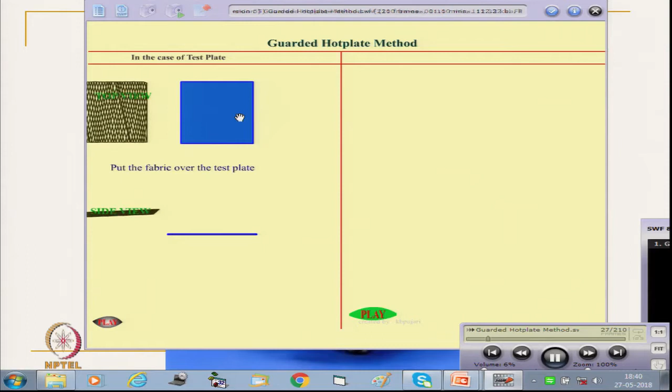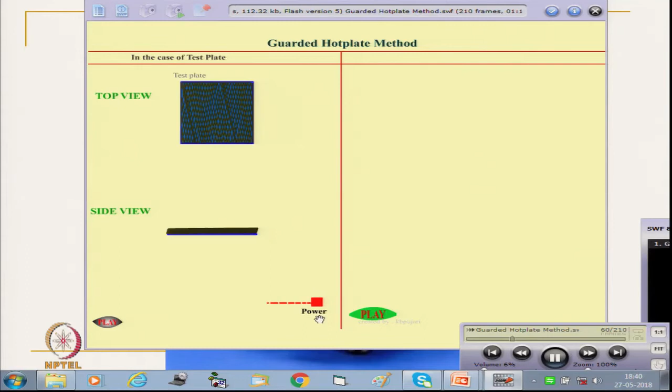Let us try to see once again the principle of the guarded hot plate. Here we have to control the heat flow through the hot plate, so that only the heat flowing through the fabric is measured. This is the normal case: a side view and top view, fabric is placed on the test plate, and the test plate is connected with a power source. As soon as the switch is turned on, heat starts flowing in different directions.

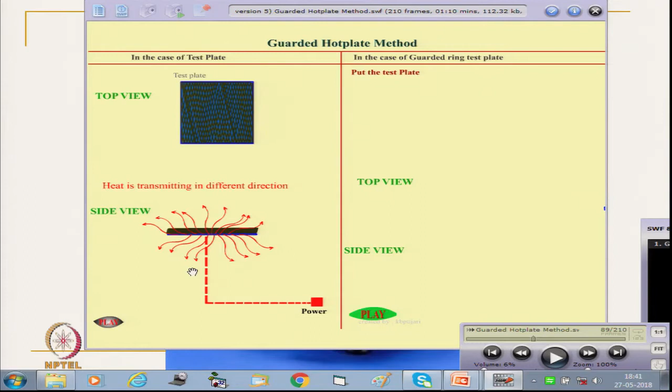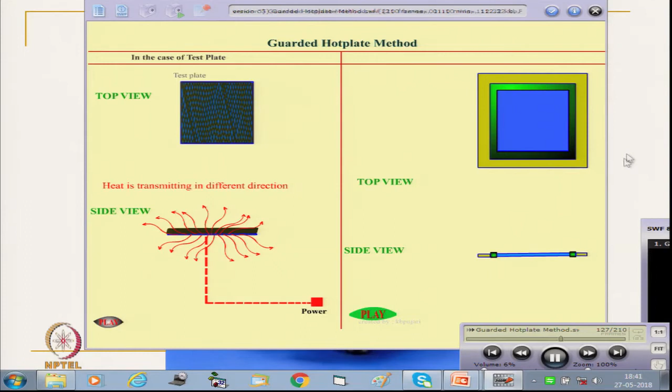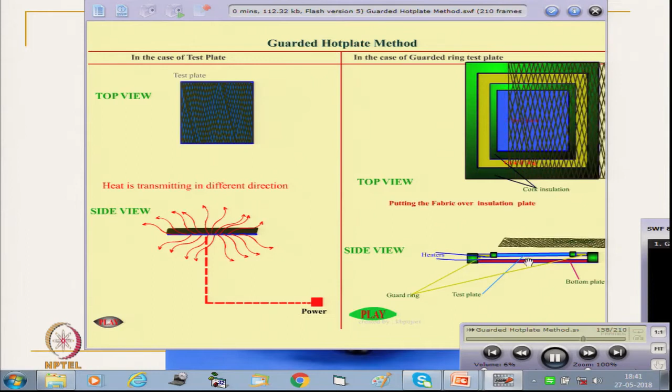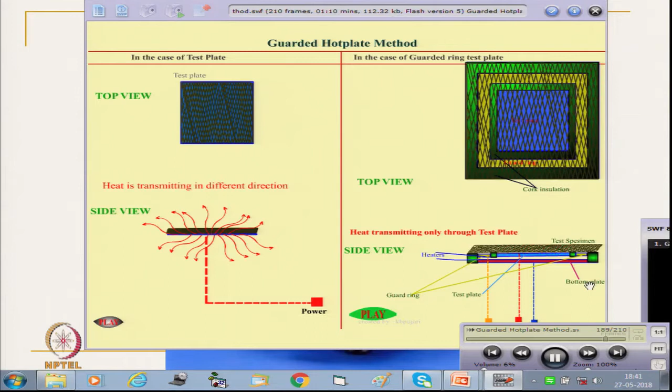What we actually want to measure is the heat flow through the fabric. So to restrict heat flow in other directions, sideways and downward, we have to use a guard ring and some insulator. This is the top view and side view of the test plate with the insulator; the guard ring is placed, and this is the bottom plate, with fabric placed over it. Both the guard ring and bottom plate, and the test plate, are heated at the same temperature, so that no temperature gradient exists, and heat is transmitted only through the test plate and fabric sample. Accordingly, we can measure the heat transmission.

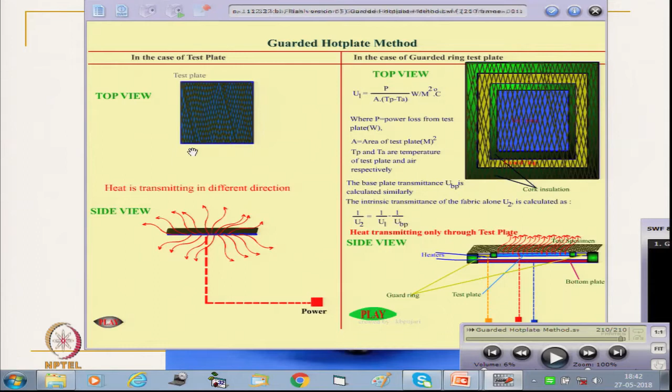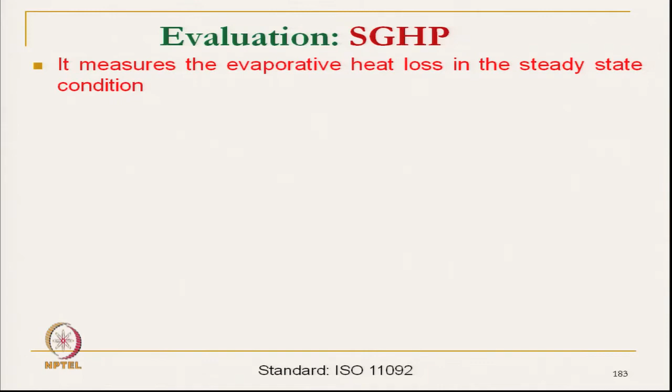In the sweating guarded hot plate, the principle of measuring heat transmission remains the same, but in addition, water is supplied, and the plate here is not the same similar plate - it is a perforated plate, which simulates sweating while the principle remains the same. So the sweating guarded hot plate measures the evaporative heat loss in steady state condition, whereas the guarded hot plate measures thermal transmission, heat transmission. Here, evaporative heat loss is measured.

When moisture gets transmitted, how much heat it takes away gives an idea about moisture transmission. The temperature of the guarded hot plate is kept at skin temperature, which is very important, and this has to be kept constant. The total water vapor resistance is calculated - this is RET, the water vapor resistance including the air layer, fabric layer, and air layer - expressed in terms of meter square Pascal per watt.

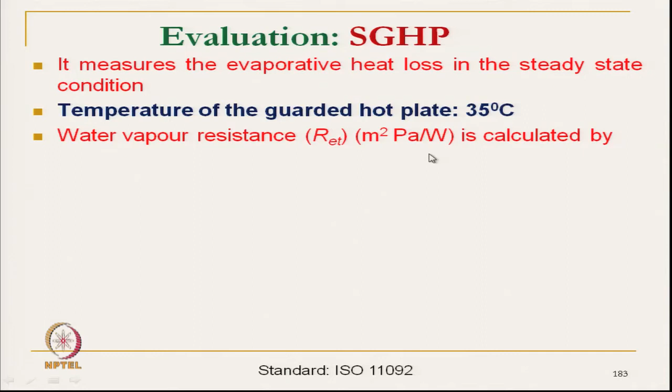So in terms of heat transmission, it is measured using this equation, where A is the area, and Pm is the saturated water vapor partial pressure of the measuring unit - meaning the measuring unit is at saturated condition with water vapor Pm. PA is the partial water vapor pressure of the atmosphere, so this gives the water vapor pressure difference. H is the amount of heat supplied for evaporation, delta H is the correction factor, and RET0 is the evaporative constant of the instrument. This is the total system.

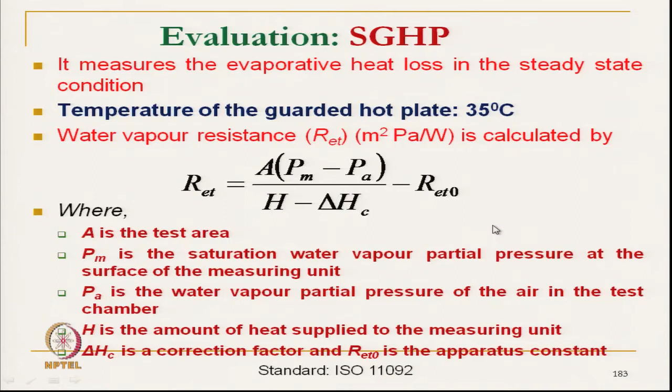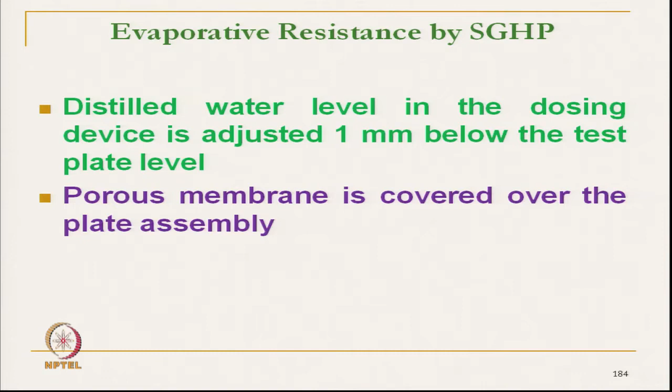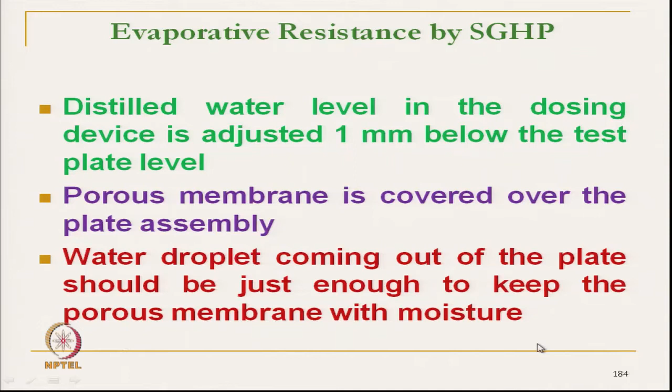Water droplets coming out of the plate should be just enough to keep the porous membrane moist - it should not wet the fabric.

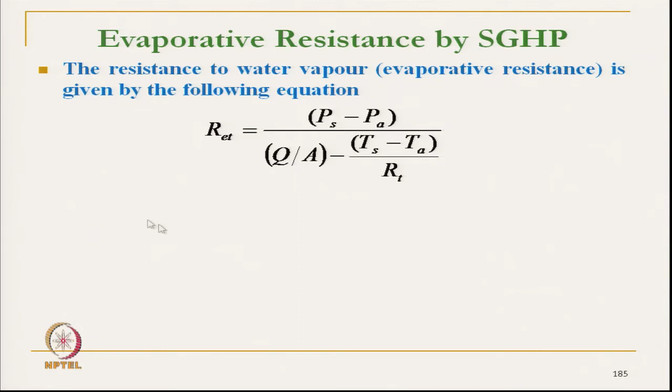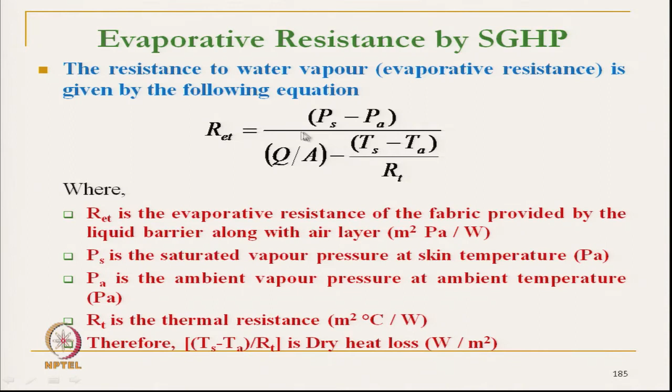So that is the dry heat loss, and here is the wet heat loss, which is the total heat loss. If we take the total heat loss and subtract the dry heat loss from it, we get the heat loss due to evaporation.

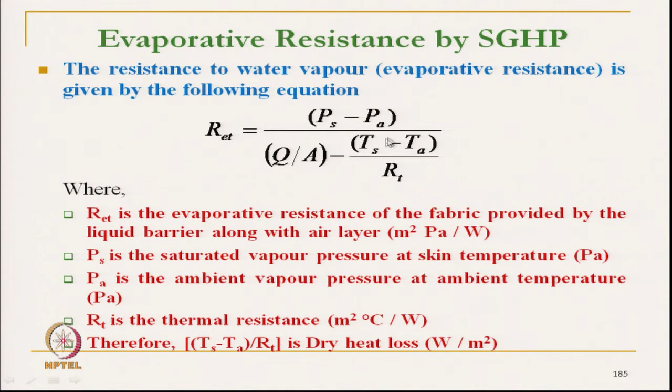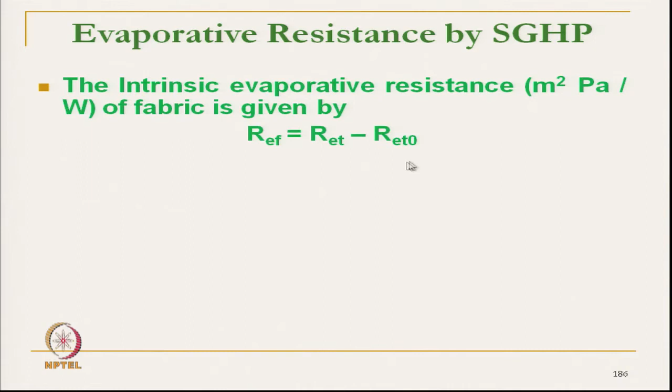So total evaporative heat loss is measured by the pressure difference, and the evaporative resistance we can measure by subtracting the evaporative resistance of the air layer. The permeability index we can measure from the dry resistance and the wet resistance. RCT is the dry thermal resistance, and RET is the evaporative thermal resistance, so the ratio gives the permeability index of the fabric. We can get the evaporative resistance of the fabric as well as the permeability index, with K as the constant. The dry heat loss we can measure in dry state.

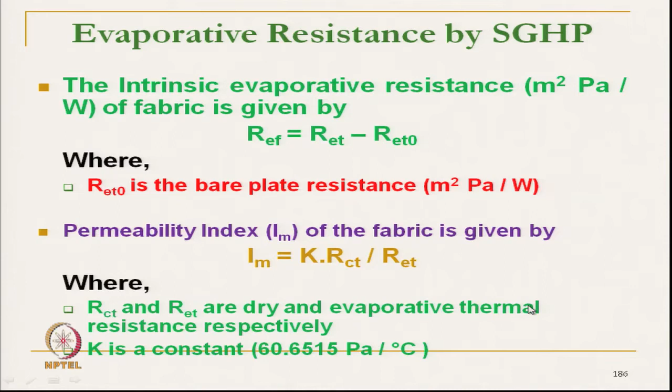To get the actual evaporative resistance of the fabric, we have to test two times. One is bare plate testing, to know the moisture vapor transmission of the air, and we have to test in the dry condition to know the dry resistance of the fabric, the dry heat loss of the fabric. So we should do repeated testing.

The next instrument is the Permetest. It is used when we want to know the moisture transmission at a very fast level. This instrument gives the result at a faster rate, whereas other instruments we have seen, like the cup method, take more time. So this method gives the moisture transmission at a higher, faster rate.

It works on the principle of heat flux sensing. That means as the moisture gets transmitted, it takes away heat, and that heat flux is measured. The temperature of the measuring head is maintained at 35 degree Celsius, and heat is supplied to maintain that temperature. As the moisture gets evaporated through the fabric, it takes away heat from the system.

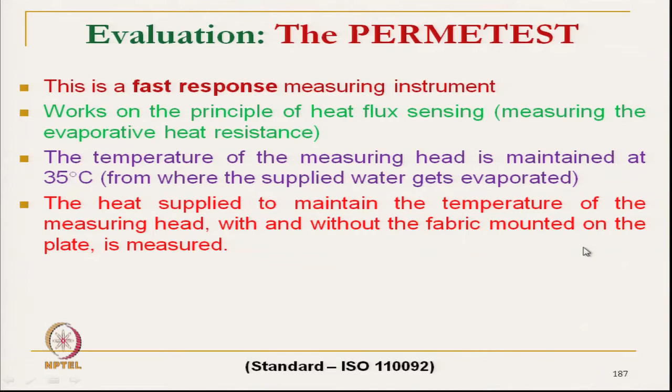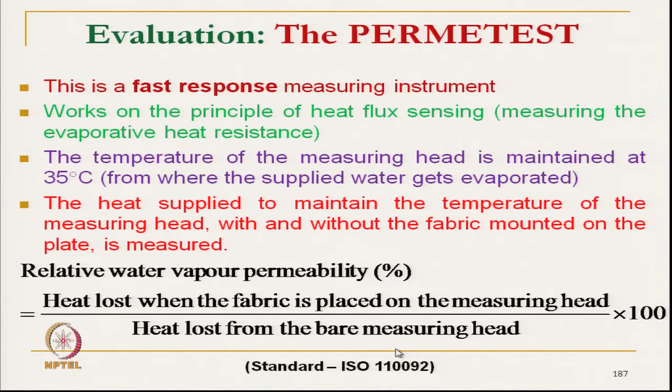To maintain that temperature, since the temperature drops, the system will draw excess heat to maintain 35 degree Celsius. That heat is indirectly used for evaporation. So it indirectly measures the heat supplied to maintain the temperature of the measuring head, with and without fabric. The ratio gives us the idea: relative water vapor permeability is the heat loss when fabric is placed on the measuring head versus the heat loss when there is no fabric but water is present. This is the system where the instrument works on the principle of heat flux sensing.

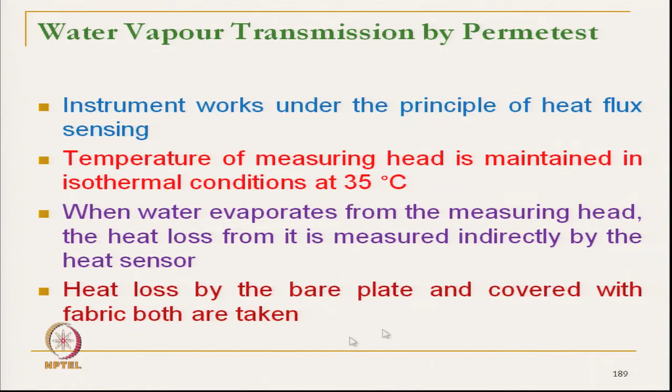This is the heat flow sensor. To maintain the temperature, it will draw extra heat from the heater, and that extra heat is measured by the heat flow sensor. That is the quantity of heat flux. The temperature of the measuring head is maintained at isothermal condition, 35 degree Celsius. When water evaporates from the measuring head, the heat loss is measured indirectly by the heat sensor, and heat loss with the bare plate and covered with fabric are both taken, and the ratio is measured.

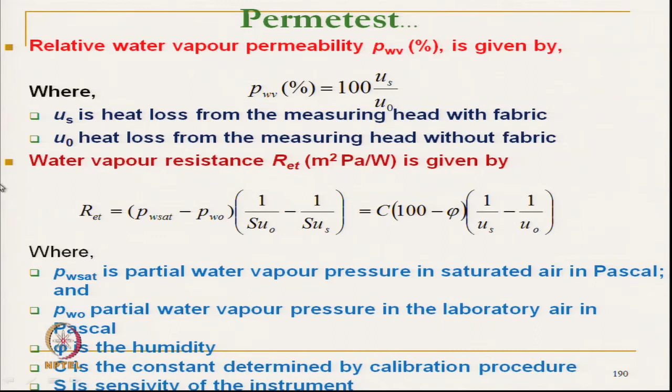So this is the way of expression. RET is the water vapor resistance, and relative water vapor permeability is the ratio of heat loss from the measuring head with fabric to heat loss without fabric. This way we can measure the permeability characteristics, or water vapor permeability characteristics, and water vapor resistance.

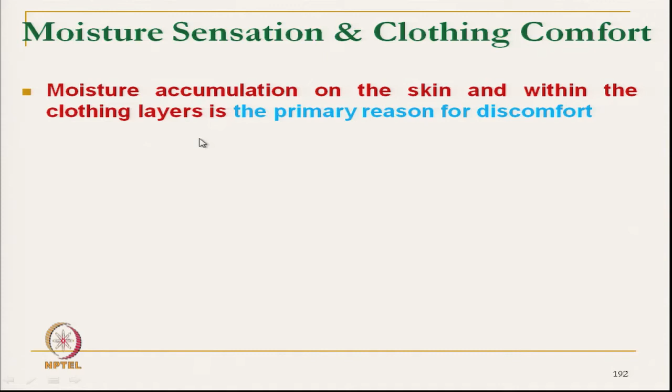The last segment is moisture sensation and clothing comfort. Moisture sensation is extremely important and directly affects comfort. The accumulation of moisture on the skin and within the clothing layer is the primary reason for discomfort, and this problem is intensified further in functional clothing, because we need comfort as well as function, and most functional clothing is covered with an outer layer which is basically coated, so moisture vapor permeability is restricted and free flow is not there. This problem is intensified in functional clothing because it is frequently used under stressful environments, where moisture accumulation on the skin and within the clothing layer contributes to wearer discomfort.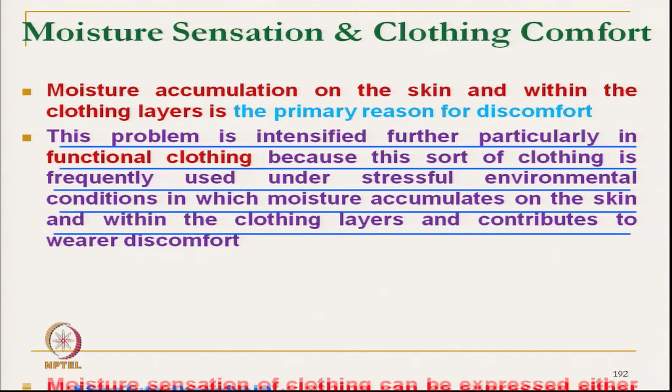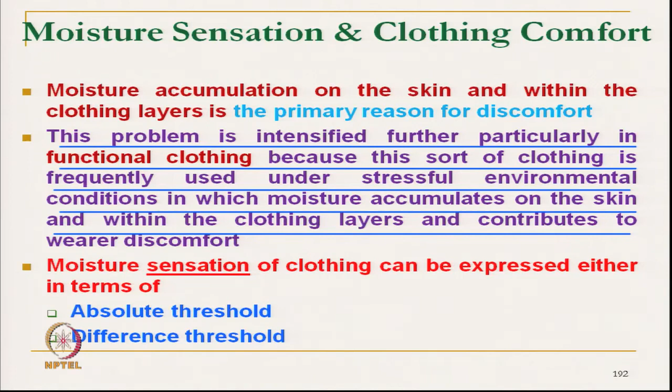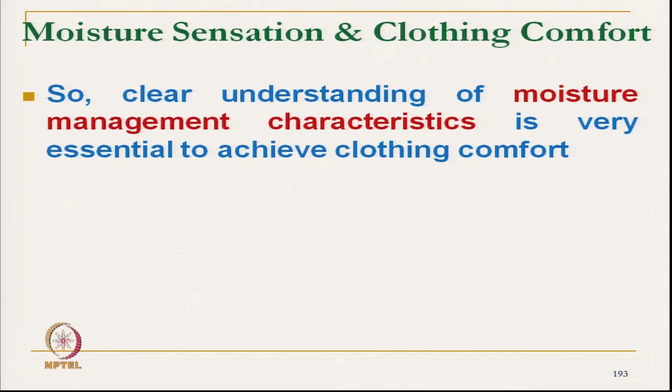So sensation of moisture comfort, moisture inside the microclimate, is extremely important, and we have to understand the transmission characteristics clearly - transmission in the form of liquid moisture and in vapor form. Sensation of moisture can be expressed either in terms of absolute threshold or difference threshold - psychologically we get some sensation, and all these sensations are related to the transmission characteristics. If we can control the transmission characteristics properly, we can get comfort. Clear understanding of moisture management characteristics is very essential to achieve clothing comfort. So if we want to achieve clothing comfort, we have to understand the moisture transmission characteristics, how to manage moisture within the textile material.